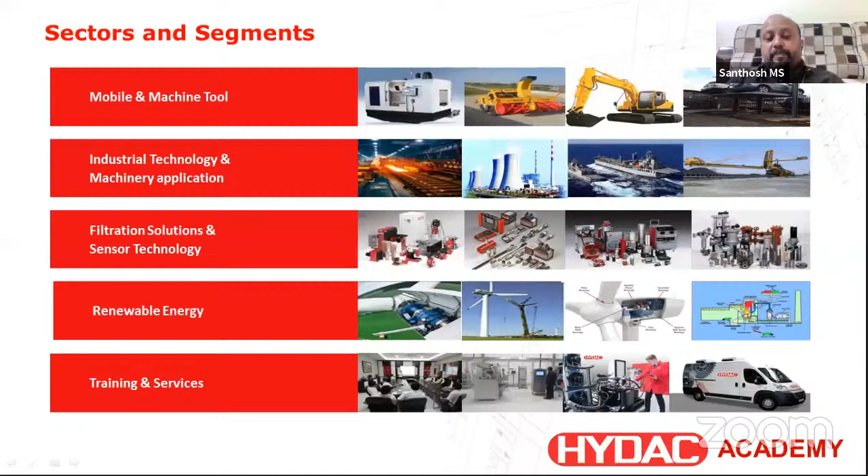We are working towards educating a lot of our customers, and at the same time, we are also working with future engineers, especially young engineers. We want to build this industrial knowledge right in their education time itself, and we work a lot with universities and institutions.

When it comes to our manufacturing, we have 5 manufacturing plants across India, out of which 2 are in Maharashtra, in Mumbai, 2 are in Coimbatore, and 1 manufacturing plant we have in Bangalore also.

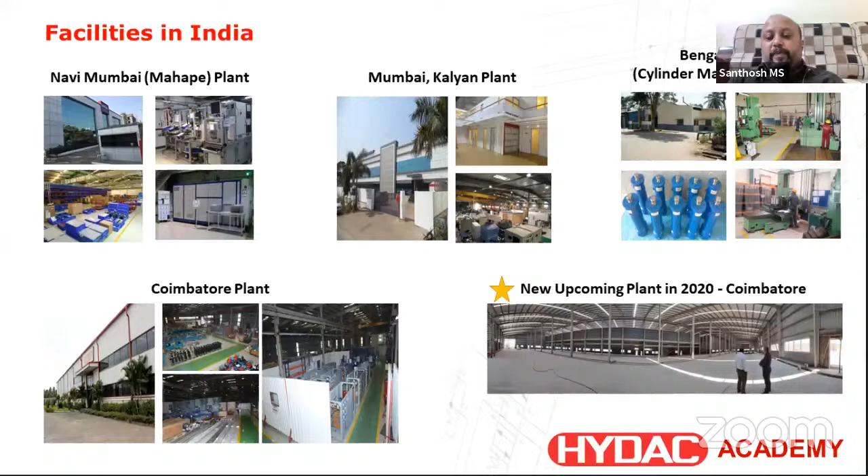In the Mahape plant, we predominantly manufacture auto transmission gearboxes for Mahindra and Mahindra, completely provided by us. The rest of the plants cater towards our automation services. We also have one more upcoming plant in Coimbatore. Due to COVID it got delayed, but by November end this plant is going to be fully functional.

As I told you, we are in the education front also, supporting all technical institutions and universities. At the same time, one of our prime focuses is also to train the industries, which we have been doing very actively since the start of 2019. In this process, to cater to training facilities, we have been working towards Industry 4.0, which is our main topic today, so I'll be discussing more on these things.

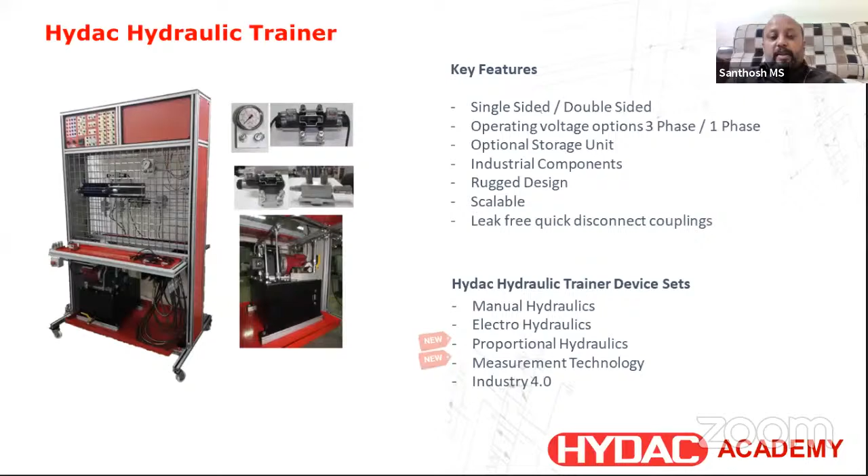Since 2019 we have built a lot of made-in-India products, especially for the education sector. We have come up with a dedicated hydraulic training system, similarly pneumatic training systems, and we've come up with programmable logic controllers and a lot of sensors.

Sensors will play a very key important role in upcoming future technology. So we cater to industrial sensors, process related sensors, advanced sensors like barcodes, RFIDs, and these are also upgradable to Industry 4.0. We have developed all these things completely indigenized.

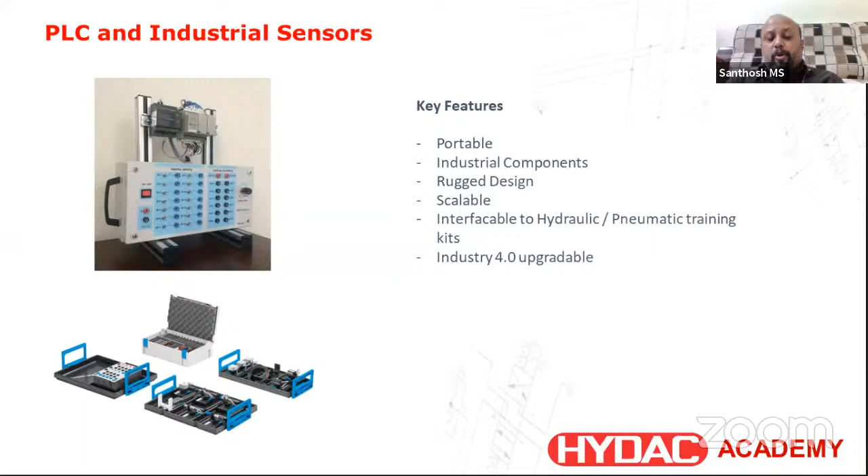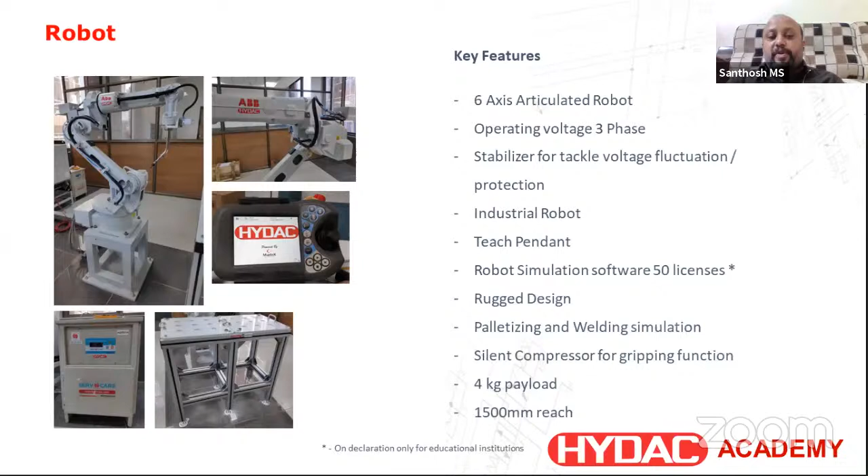We also provide robotic solutions and robotic training, for which we have an exclusive tie-up with ABB Robots.

So now coming to our main topic, emerging trends in automation technologies.

So whenever we talk about automation, the first thing that comes to mind is industrial automation. So what is industrial automation? Industrial automation is the use of control systems.

Whenever we talk about a control system, it's always a combination of hardware which is governed or guided by software. This can be as basic as computers, which can do wonders, or at the same time a complex mechatronic system such as robotics, which comprises multiple technologies. A bulkier robot will have hydraulics, pneumatics, electric drives and controls, everything, superseded by high level algorithms for motion logic controlling, which we basically refer to as information technologies.

This particular combination of everything can be used to handle different processes and machinery in any industry. Typically, there is always a misconception that any automation done is to replace human beings and reduce manpower. It can be seen in a better perspective, saying that whatever automation or engineering we are doing is basically to assist human beings in order to make their life simpler.

This industrial automation terminology, we also refer to as the second step beyond mechanization. When we talk about the various developments industries have done, we talk about different phases where it has changed the way industry works. So automation is basically a second step beyond mechanization.

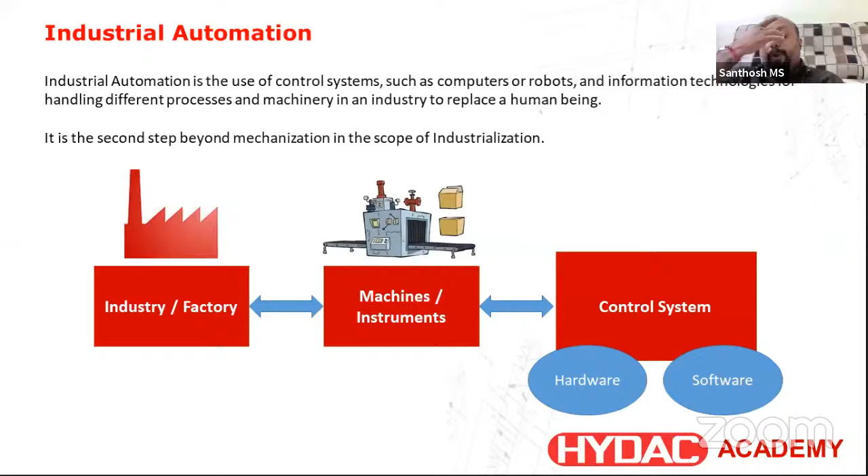So which are the technologies predominantly contributing to industrial automation? Just to name a few, one is hydraulics. I work for a hydraulic company, so it was my duty to put hydraulics in place first, otherwise there is no specific order. Again, pneumatics, and in a generalized way, electric drives and controls. Apart from this, we may also have building technology, machine building technology, linear motion assemblies, assembly technology, and various other things.

But primarily when it comes to doing the work, for me the prime importance would be hydraulic, pneumatic, and electric drive and control. When I say electric drive and control, it can be segregated into many other technologies which can be PLCs, variable frequency drives, AC servo drives, computer numeric controls, DC drives, SCADA systems, DCS systems, and so on. These all come under the umbrella of drives and controls.

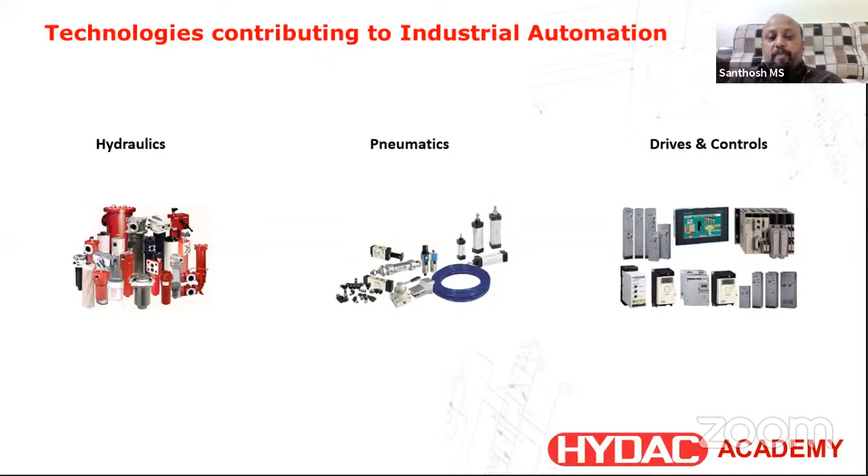These things didn't evolve in a single day. It has taken a lot of years where each of these technologies has grown in a very drastic and scalable way. Just to give you an idea, I'm taking hydraulics as a base. The way I talk about hydraulics, the same would apply for pneumatics, and I'll also briefly talk about electric drives and controls. When we talk about hydraulics alone as a technology, it has evolved a lot over a period of time.

Almost 2.5 centuries ago, the first law of hydraulics came, which was Pascal's law. Until almost a century later, until the late 18th century, there was no practical use of hydraulics. So technology-wise, it has grown over the past 2 or 3 centuries. It all started in the late 18th century when a person named Joseph Bramah came up with the hydraulic leverage principle and the hydraulic jack. They started using water as an energy carrier for hydraulics. Over time, we changed from water to oil because of several disadvantages with water.

Then eventually we came up with manual hydraulics, where there were a lot of manually operated components to control the flow, pressure, or direction of the fluid. The next development was electrically operated hydraulics, where we started using electrical solenoids to operate these components. Over time, we came up with continuous control hydraulics, which is basically electronically superseded hydraulics. Instead of a conventional solenoid doing discrete on-and-off operation, we introduced electronics which could do pulse width modulation, stepless control, and similar functions.

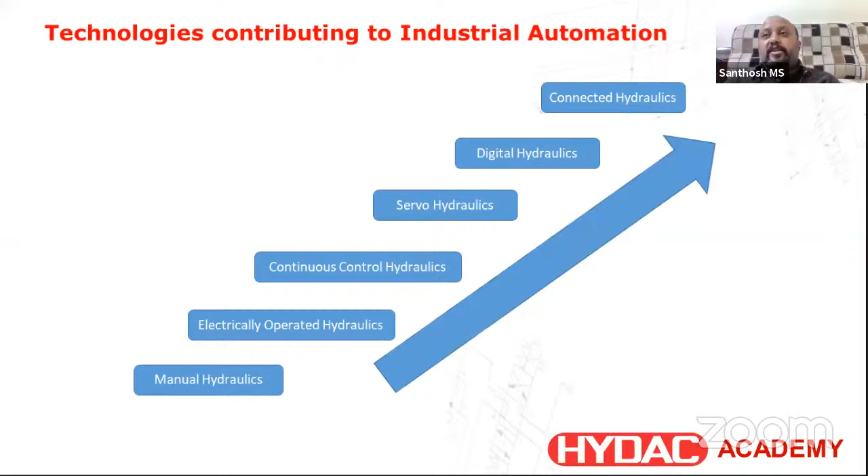But at the same time, we had a few more limitations—like if I buy, say, a Siemens PLC, I could program this particular PLC only by using Siemens software. However, with the present scenario, we now have very high-end, intelligent PLCs, where irrespective of the software I have, irrespective of the programming language I'm aware of—so if I'm good at C, I can use C to write a program to the PLC. Similarly, if I'm good with Java, I can use Java as a tool to program my PLC. So the barriers were opened up with the new technology, which we call open core engineering, or generally Industry 4.0.

However, if you take any industrial cluster, there is always a misconception now that with the latest automation technologies, one has to know software and software is going to rule the automation industry. In a way, it is true, but at the same time, the basic technologies which are there—hydraulics, pneumatics, or electric drives and controls—these things will have their own place in the automation industry, and cannot be replaced by software. These are physical and real products which are doing the work. These things can only be superseded by more intelligence. However, they will continue to prevail in the automation industry.

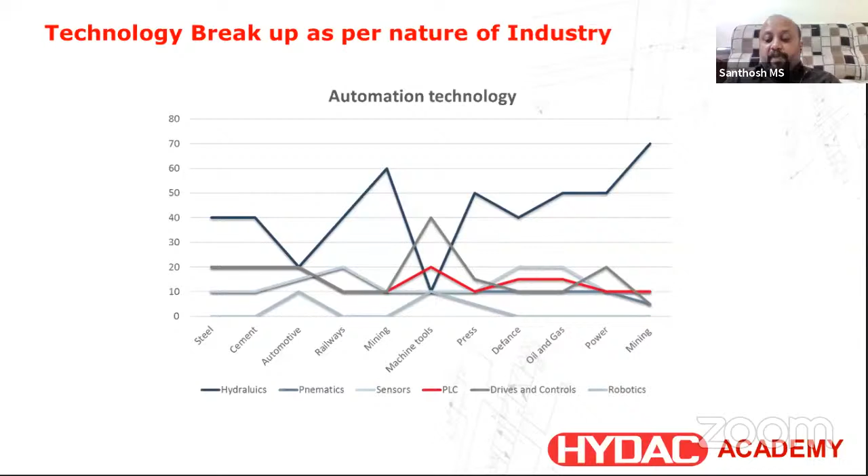However, the importance of software is continuously growing in the automation industry. So when we are in today's world, talking about connected industries, connected machines, connected products, the requirement of software and higher levels of intelligence becomes utmost important.

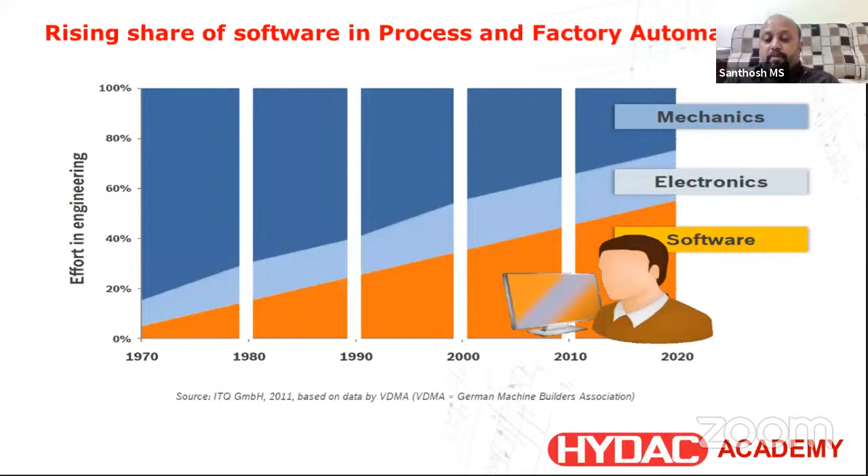So there has been a drastic change in recent years when it comes to consumer products. Just to give you an idea, in 1997 there were around 6 million computers connected to the internet. Today we're talking about 50 billion connected things. So we are not restricting the connectivity of internet only to computers. It has spread across every area now.

The televisions at home have become smart because they have connectivity to the internet. Your ACs have become smarter, your mobile phones have become smarter, and a lot of things. So when it comes to industry also, it is the same thing now.

These concepts all initially came to the consumer markets, where we predominantly started talking about a concept of IoT, Internet of Things. We wanted all our things to get connected to the internet - my car, television, mobile phones, speakers, household refrigerators, washing machine, ACs. Everything became so feasible that it all got connected to the internet for exchange of certain information. So if I wanted to remotely turn on my car, I could do that using the platform of internet.

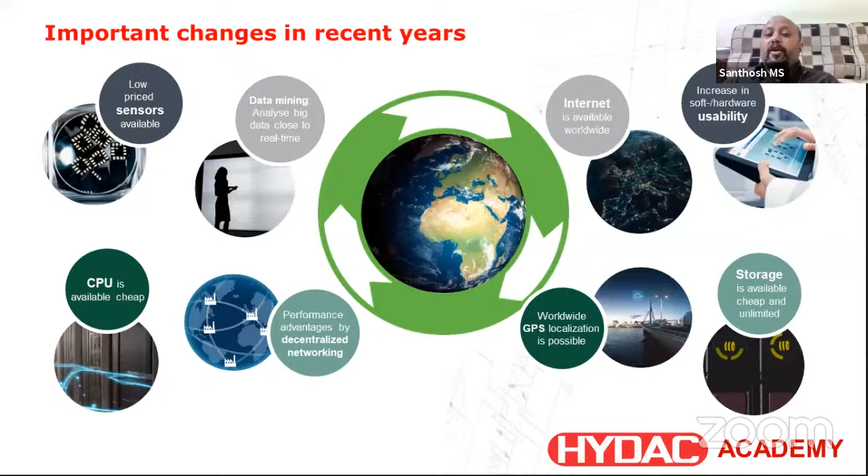So what happened was, somewhere in 2008, the government of Germany, along with some big industrial giants, came together and started discussing that most things are getting smarter. However, we need to make the manufacturing process or procedure of all these things also smarter. When this point was discussed, by that time IoT was already quite popular, so they thought, why don't we bring this IoT into industries and try to enhance the processes.

So when they came up with this concept, they started realizing that this is going to take the industry in a very, very big way. So if this is one of the biggest revolutions in industry, what were the previous revolutions?

The first revolution was in the late 18th century, which was mechanization, where we started using a lot of steam engines, steam turbines, steam power, hydraulics to automate our process in industries. Almost after a century, the second revolution came, which was mass production, or generally referred to as electrification. We started using a lot of electrical components in order to simplify the automation process and take it in a big way.

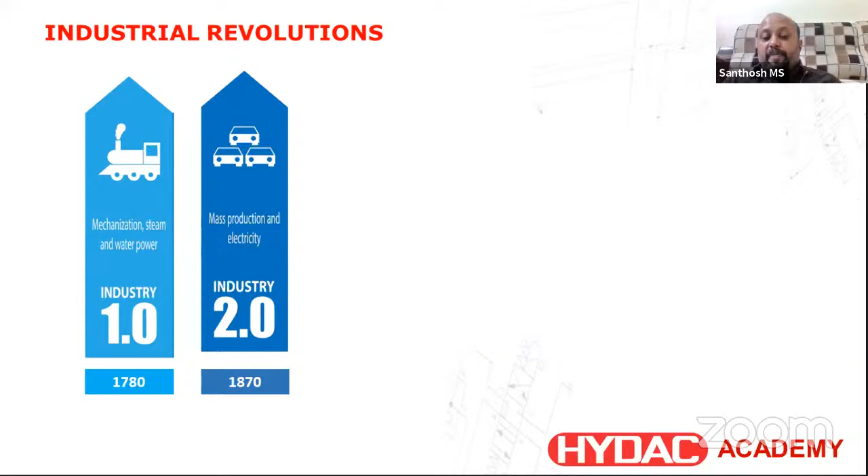Again, almost after a century, next came the introduction of microcontrollers and microprocessors. This era began as digitization. We started using microprocessors, microcontrollers, which led to PLCs, bigger mechatronic systems, and complex robotic systems.

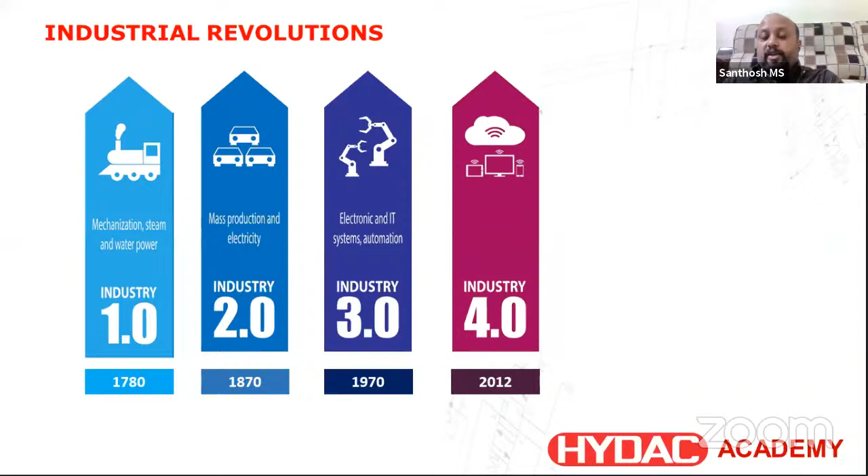After this, as close as another 4 decades now, we are into a new era called Industry 4.0. This is called the fourth industrial revolution, where we are speaking about a lot of connected machines, connected components, and all those things. These are known by different names across the globe, which can be called Industry 4.0, smart automation, digitization, connected industry, or very appropriately known as Industrial Internet of Things.

This is the present trend, and this particular technology is a people-centric technology, developed in such a way that there will be huge job opportunities in the future. We are lagging a bit behind because we are a developing country, so we have just started implementing these kinds of things, whereas developed countries like Germany and United States have done it on a very, very large scale already.

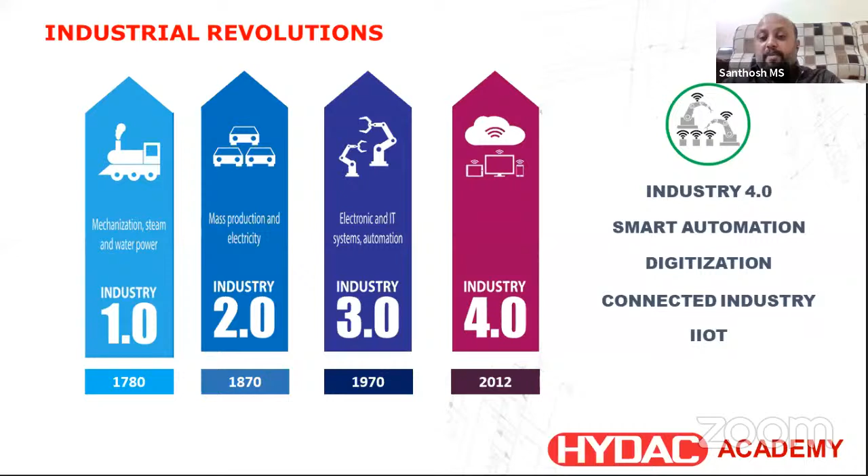So they called it an industrial revolution. Yes, it was a business revolution. We could sell products easily using this particular concept, but when it comes to product development and concept development, this was an evolution, and we have come a very long way and have got sufficient enough experience. But again, this is one of the technologies which is there to rule the industry for another 2 or 3 decades easily, because till today we are coming up with new concepts, and these concepts are being implemented in the industries.

So a very simple definition of this is: people, machines, and IT systems automatically exchange information for manufacturing products. This exchange of information can be within a factory, or it can be across multiple ICTs, within a company or within a group of companies. We are one of the companies dedicatedly working towards this particular technology.

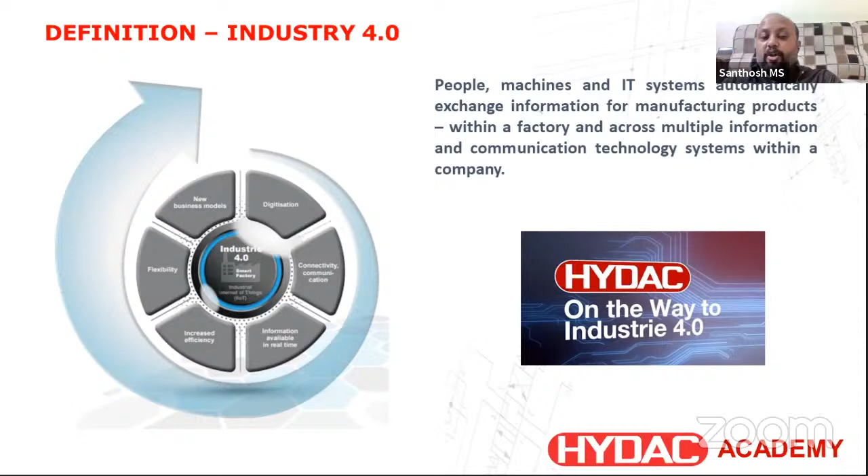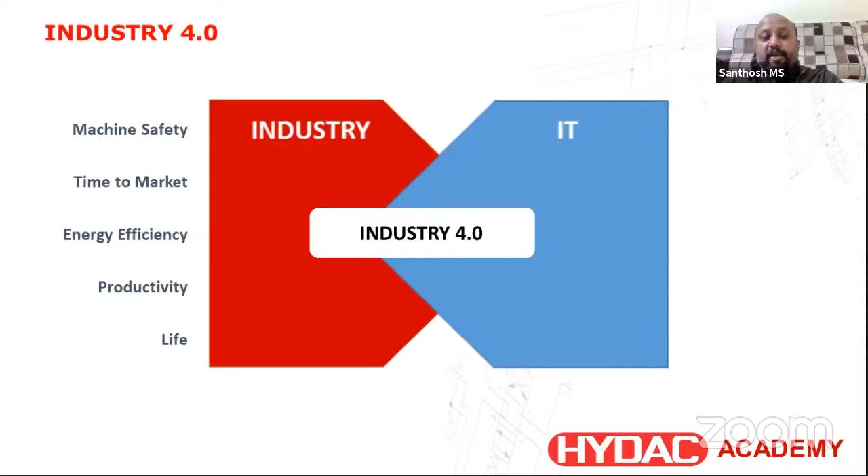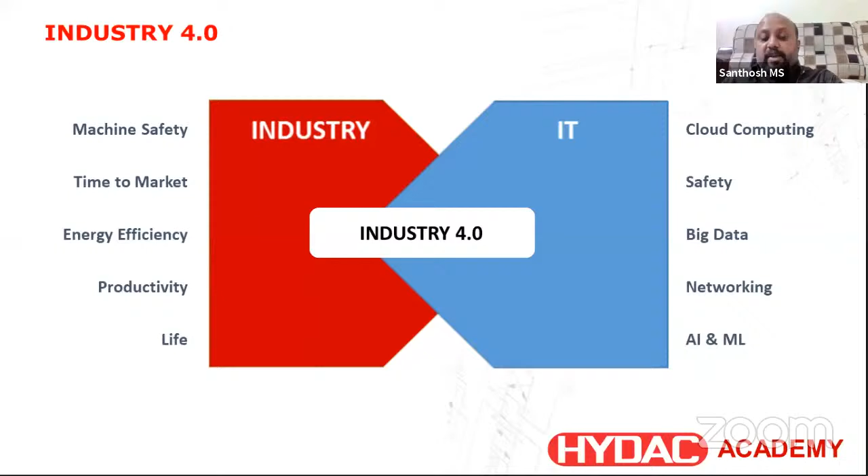In simpler terms, it is a merger of our core industrial technologies and IT-based solutions. You can see a number of parameters here which go into making this Industry 4.0. So in industry, here are a few of the technologies which are transforming the way components are being manufactured and produced.

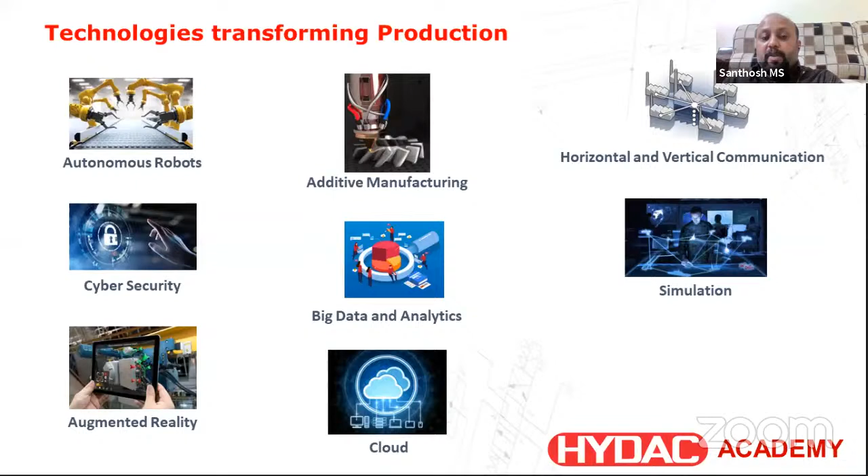These are all general things which I think everybody can relate to. One of the few very important things among these is additive manufacturing, which we generally call 3D printing nowadays. We are working a lot towards augmented reality to give a better maintenance point of view and better user experience for the consumers or users of automation.

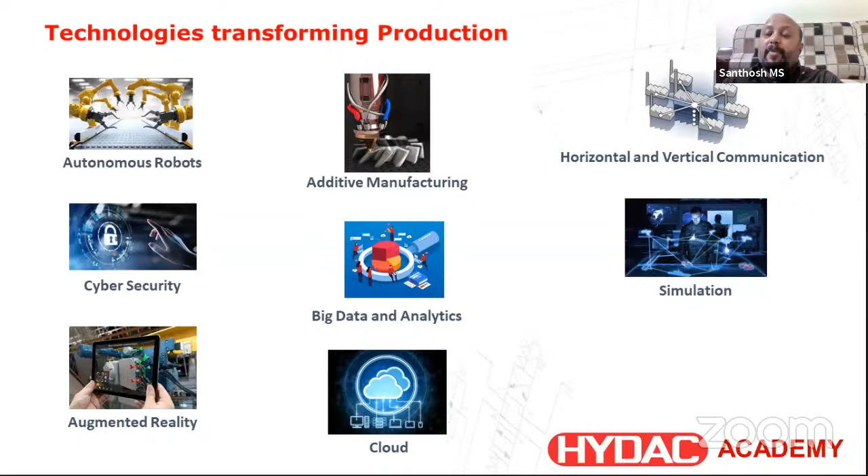At the same time, we are also giving a lot of importance to big data and analytics, where we talk a lot about collection of data and then studying from the data how this machine will behave and how it will perform. So typically, expectations from industries are all these things.

But one of the important things which all industries are looking for is from the maintenance point of view. If you generally see in industries, every 6 months we have an annual maintenance or periodic maintenance done. People started finding a lot of disadvantage with this, because even if my machine is in perfect working condition, every 6 months I stop my machine for 2 days, replace a few critical components, and then resume back to work, by which I'm losing around 2 days of my machine time.

So instead of doing that, what we have come up with is something called predictive maintenance. Instead of periodically stopping the machine, with this big data I understand the machine behavior and any deterioration in these particular parameters, so I can predict what could be the failure and accordingly take action and stop the machine for a minimal possible time and rectify it. This is going to be the future, called predictive maintenance.

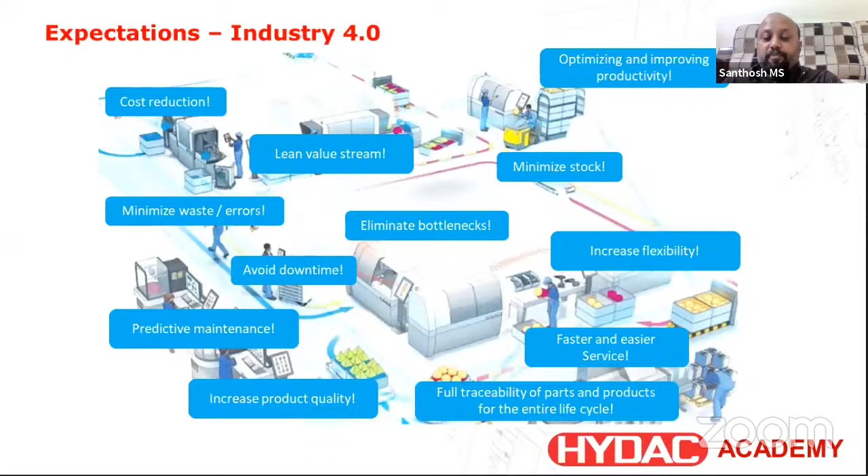A few of the advantages of implementing Industry 4.0: one is flexibility, because you get to use the programming language which you are strong in.

Very innovative solutions, because these kind of machines and automation can be customized from customer to customer, machine to machine. So in the future, no two machines can be identical. Everything can be customized.

Very unique, because we're using modern day simulation tools, what we call cyber physical systems. I can do all my preliminary setup, new product development, everything on a digital platform, and then straight away that can be implemented onto a real machine. Very efficient, because there are a lot of ready-made software tools, by which my implementations can be faster.

And my efficiency can be increased. This particular technology, Industry 4.0, unlike my previous three big revolutions, is future proof, because it's software based, and softwares can be upgraded. Just like what we receive a firmware upgrade on our mobile phones, the same way product quality and enhancements can be done over the internet, even without the interference of any machines or anything.

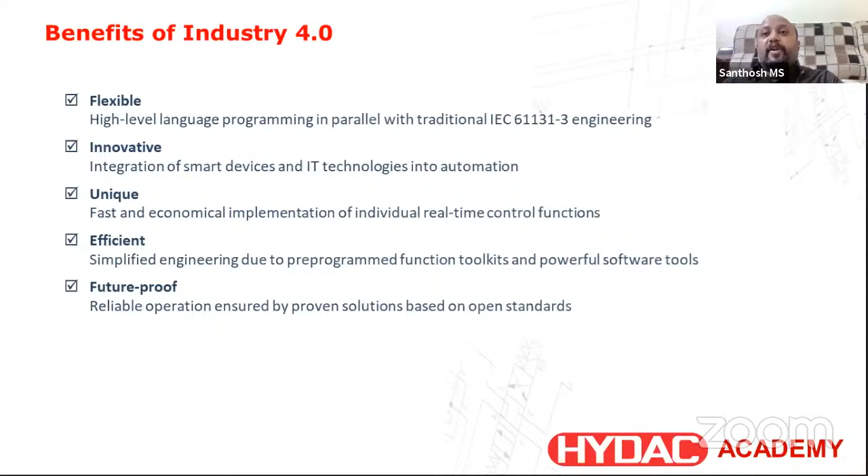So when it comes to education also, we are doing a lot of work, but there is huge scope for education also, because the engineers of the future will have to change themselves slightly for it.

This I am not saying, but these are a few newspaper articles which I have collected over a period of time. In one of the articles, published somewhere in 2016 itself, it said that by 2021, the IT sector is going to lose around 6.4 lakh jobs to automation. This doesn't mean that the requirement in the IT industry is going to go down, but the actual statistics show there is going to be a huge surge in demand for the automation industry. Now, thanks to COVID, this has got slightly slowed down, and India being a developing country, it may not stick to 2021, but at least by 2023 or 2024, this is going to be a reality in India also.

So similarly, there was another article in the Huffington Post which said that Industry 4.0 could make India a global leader in manufacturing. The reason being, we have got the highest intellectual capital, the best brains in India. We are one of the highest producers of engineers, and 60% of our population is in the working age group, which means the whole world is looking at India as the intellectual capital.

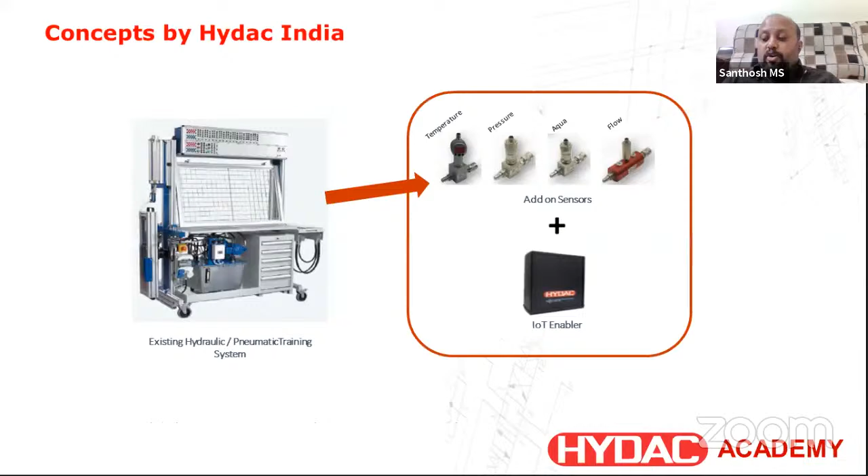So with this short introduction, I end my topic and I leave the session for open discussion.

So this is one of the concepts which I want to show before I close. We have been working with a lot of industries to train engineers. At the same time, we have been working with a few prime education institutions, where students are already learning about automation technologies, but in order to gear them up for Industry 4.0, we have come up with some unique concepts where, using their existing infrastructure, we have brought it to the Industry 4.0 platform.

And very happy to announce also, we have done a pilot project in an education institution in Mysore, at the National Institute of Engineering, where we have converted all their automation related training systems and brought them into the Industry 4.0 platform.

So literally, students now can sit at their home, they can access the training systems which are there in the education institution, they can develop dashboards, they are running some process, they are collecting data, and further using this data, they have started working on artificial intelligence, machine learning, augmented reality, all those things.